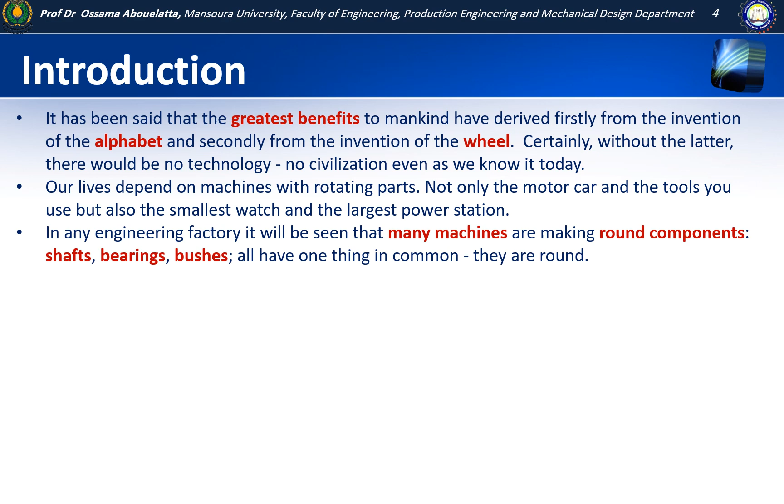Roundness, along with size, play critical roles in how parts are specified, designed, and fitted. However, roundness diverts from the standard methods of defining dimensions such as length, area, and volume. Roundness is more of a relationship between dimensions and must be measured in a completely different manner. The measure of roundness, as well as other metrics of dimensionality, is known as metrology, the scientific study of measurement. In order to measure roundness, we need to quantify what roundness actually is.

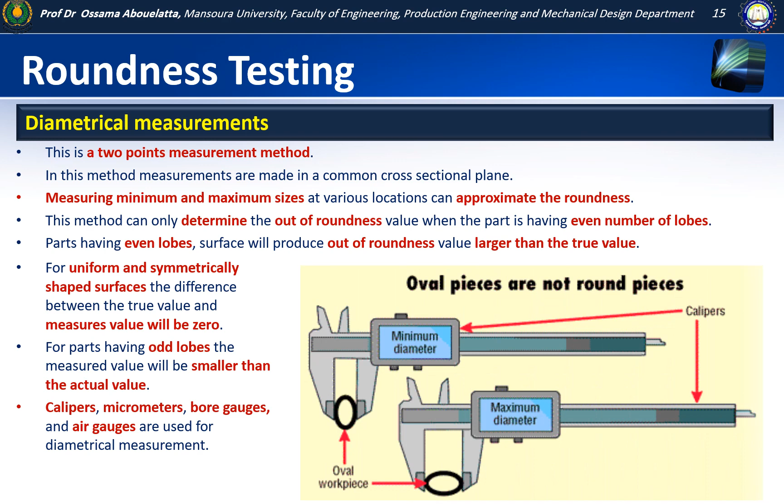So, how do you measure circularity? Well, if I'm looking at the same cylinder, to measure circularity, you rotate the cylinder at independent cross sections. This means you're only rotating in one spot at a time. You can do this for multiple cross sections, but what you want to do is rotate, not translate. You want to rotate, not move it along the length. I'll move it to get into a new cross section, but that's it. When I measure circularity, I only rotate.

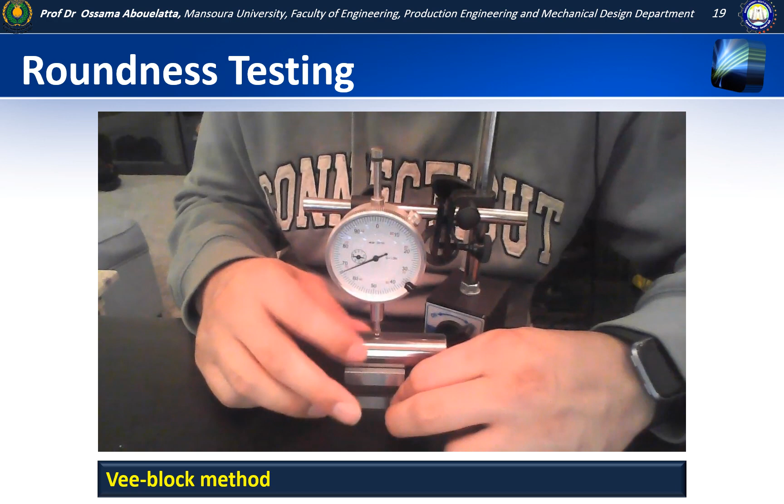What's good practice is to do this rotation at a couple different locations along the cylindrical feature. You're rotating, you are not going like this, like in straightness. This is what you do for straightness. For circularity, you just rotate. And that's circularity.

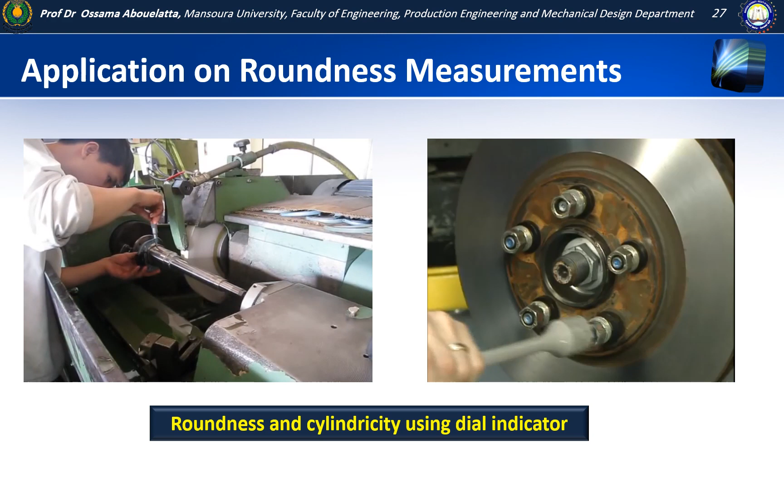Attach the supplied dial indicator to a rigid part of the vehicle spindle. Make sure the vice grip is clamped securely by adjusting the knurled knob in the vice grip handle. Make sure the vice grip location is close enough to the rotor as to allow the flex arm and gauge of the dial indicator to make contact on the rotor's friction surface. Check to ensure the contact tip is tightened securely. The needle of the gauge should be contacting the rotor approximately half an inch from its outermost diameter.

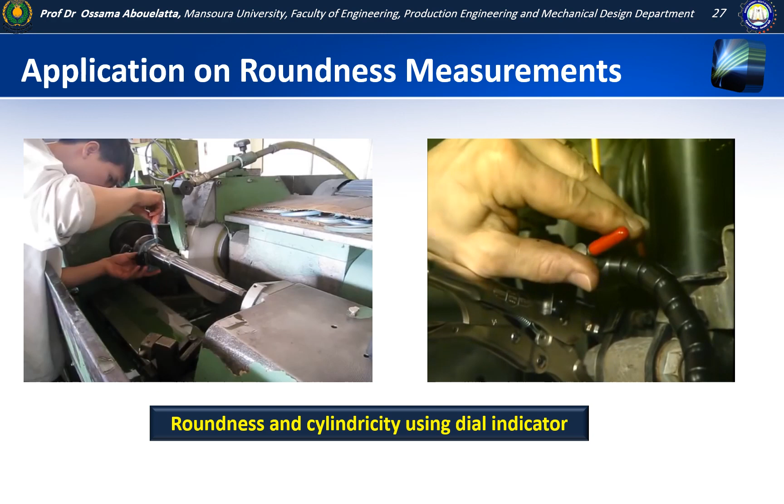With the cam lever in the released position, take the slack out of the dial indicator flex arm by rotating the knurled ring at the end of the flex arm clockwise with the dial indicator gauge in its desired position. With the slack taken out of the flex arm, a simple turn of the cam lever will secure the arm and gauge rigidly in place. In the tightened position, the cam lever should be in line with the flex arm.

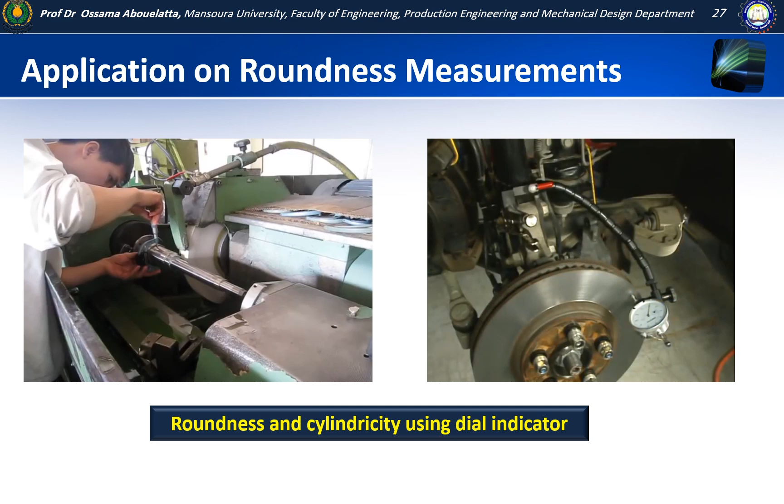Lift the spring-loaded needle up off of the rotor a few times to ensure the tip of the needle is making good contact on the rotor friction surface and that there is no movement in the dial indicator or flex arm. Always rotate the rotor in the clockwise direction when checking for lateral runout. Notice how the gauge oscillates back and forth between the high and low points on the rotor. The lowest reading is the lowest spot on the rotor.

Once you determine the low spot, gently push the gauge to bring the needle to top dead center, or pointing towards the rotor. Then rotate the face of the gauge to set zero at this needle location. Rotate the rotor again to ensure the low spot is exactly at the zero setting. With the low spot now set at zero, continue rotating the rotor clockwise to determine the high spot. This is the location of the highest runout, and note the amount, which is read in thousandths of an inch.

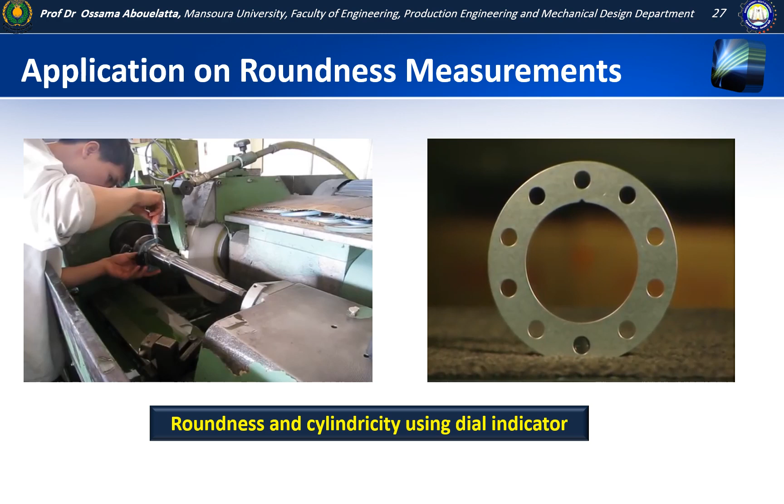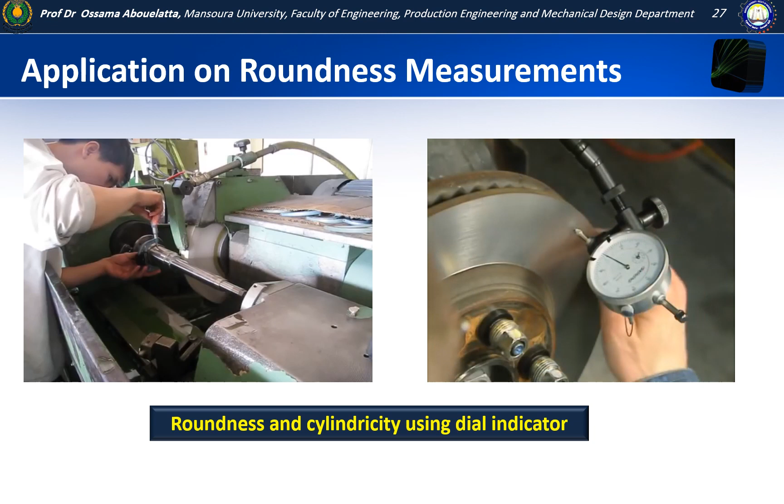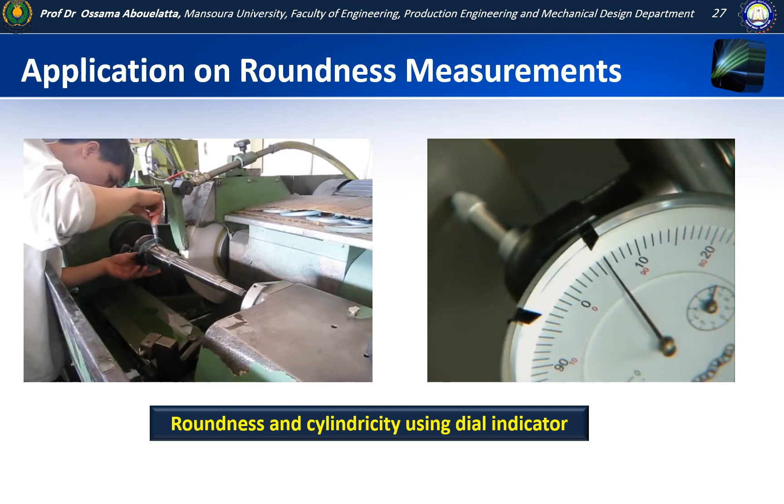This particular vehicle is in excess of the 2,000th specification set by the manufacturer, and we will need to correct the lateral runout using the Brake-Align correction plates. We have found 6,000ths of lateral runout and need to mark the rotor in the exact location of the high spot. Rotate the rotor again clockwise and stop the rotation when you reach the highest reading. Where the needle contacts the rotor is the exact location of the high spot. Using the supplied marker, mark this location on both the rotor and the closest wheel stud.

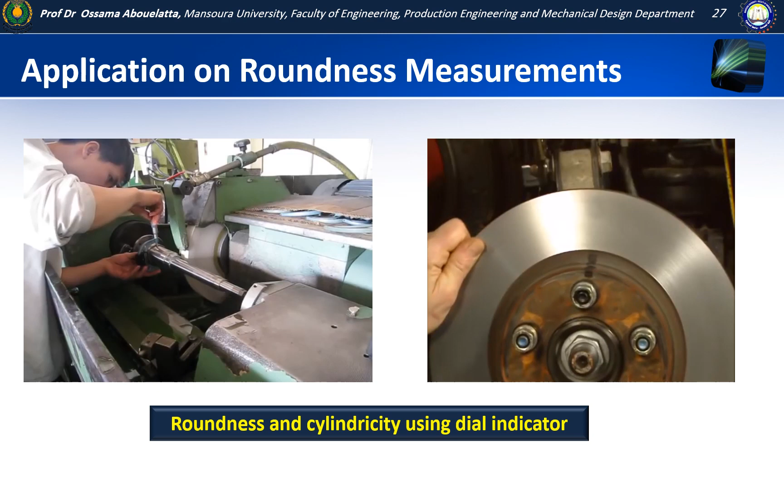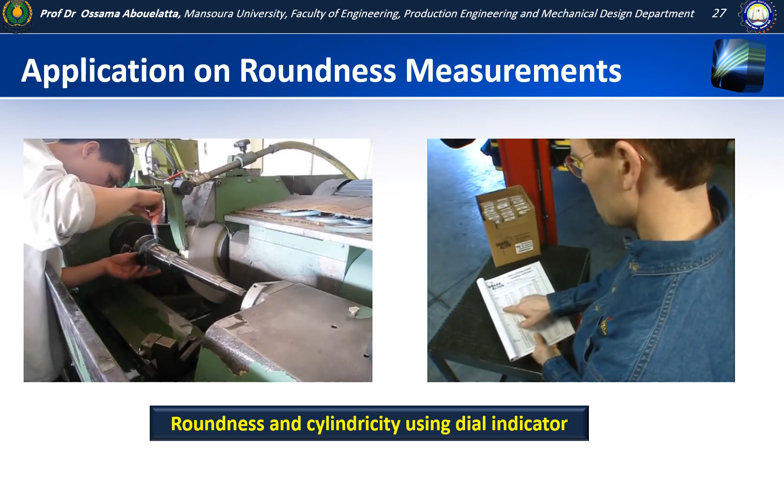Marking both points is very important. Pivot the dial indicator out of the way. We have found it helpful to rotate the rotor to bring the high spot to top dead center, or at 12 o'clock. Using the Brake-Align application chart, locate the year and model of the vehicle you're servicing. This 1999 Seville STS will use an 801 correction plate. The XX in the part number indicates the amount of taper or correction.